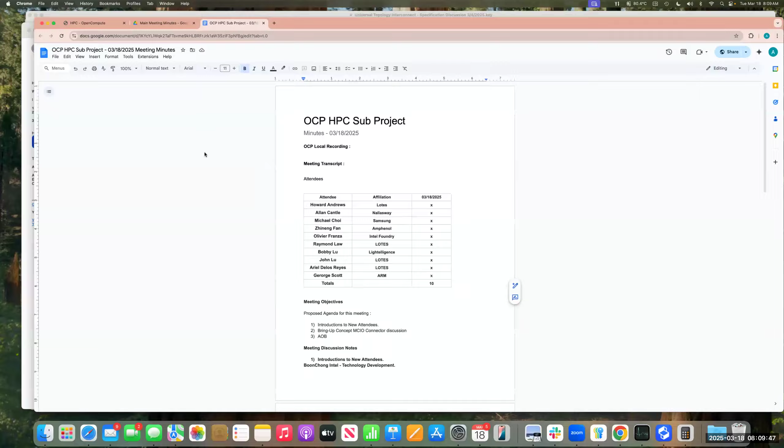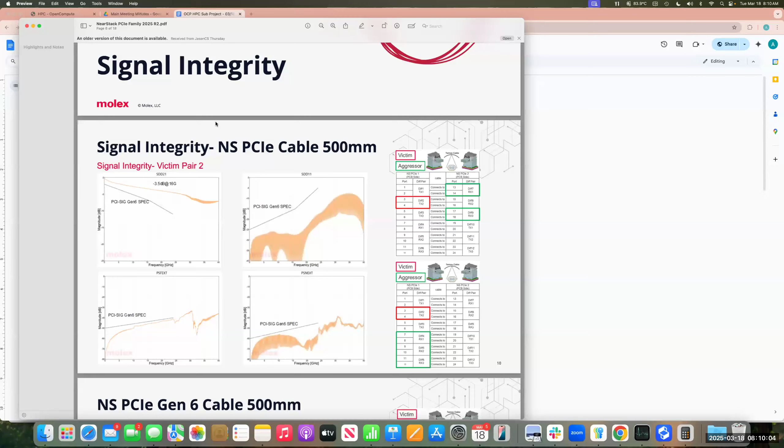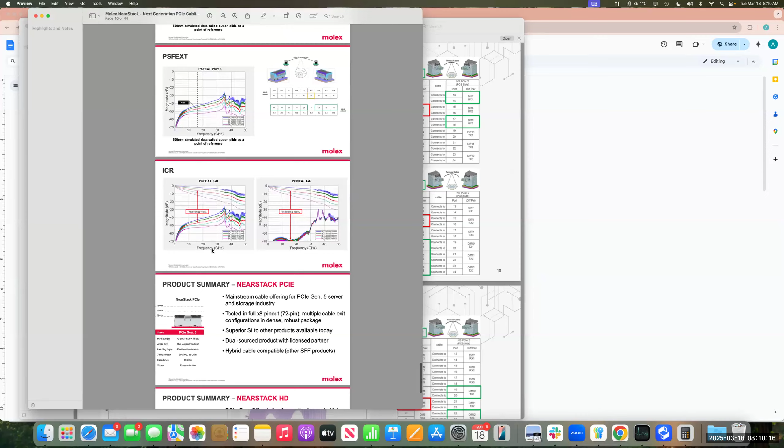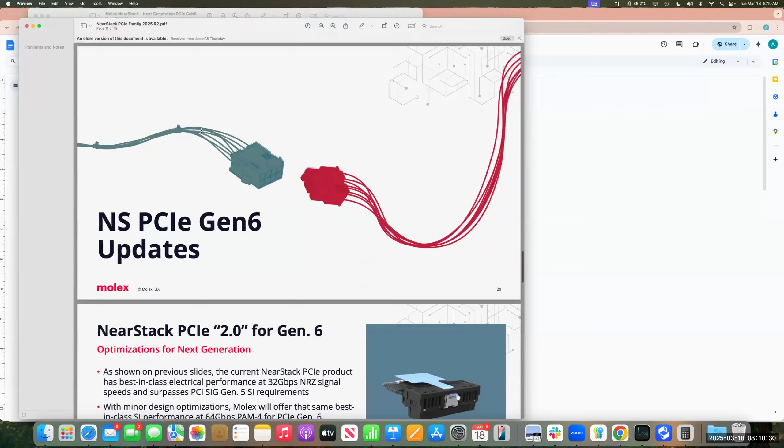Right, okay. I was also looking at NearStack, from a size perspective and a height profile perspective, just comparisons. There's nobody on from Molex, but they did give me some data that helped me ascertain the actual difference between the two. They did a nice comparison for me. So they've got their NearStack HD, which is 34 gauge, and their PCI NearStacks are 30 gauge, just like everybody else.

I was investigating this from a height profile perspective, with the lower profile ones; I'll show you a bit of that in a moment. They're showing these tables here. This is a 2 meter length cable, 34 gauge, with 23 dB nominal loss, or 25 max, at 15 gigs. It's 25 dB, 27, whereas the 30 gauge is in the region of 18. Or as I put it up here, you're at 7 dB per meter versus 13 dB per meter for the 34 gauge.

Unfortunately the Molex guys aren't on, I don't believe. By the way, morning, Mitch. In general, on these specifications, guys, is this from the mated connector, the pad on the PCB, to the mated connector on the other end, or just the cable connector, or just the cable itself? These sorts of numbers. I cannot speak for Molex data. Well, as an industry, if I asked what is the loss of your cable, would you give the cable itself, the connectors attached, or PCB pad to PCB pad? What would Amphenol do? Is there an industry practice when you quote a cable loss?

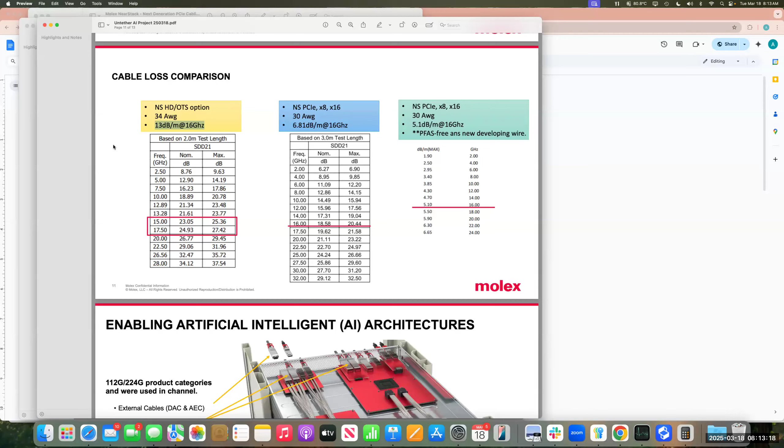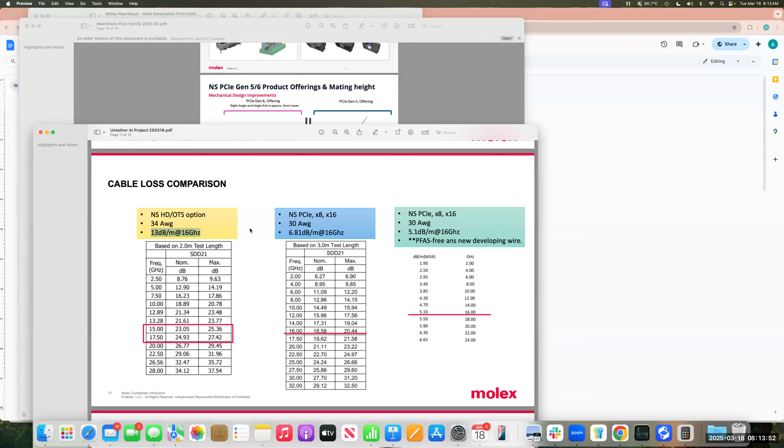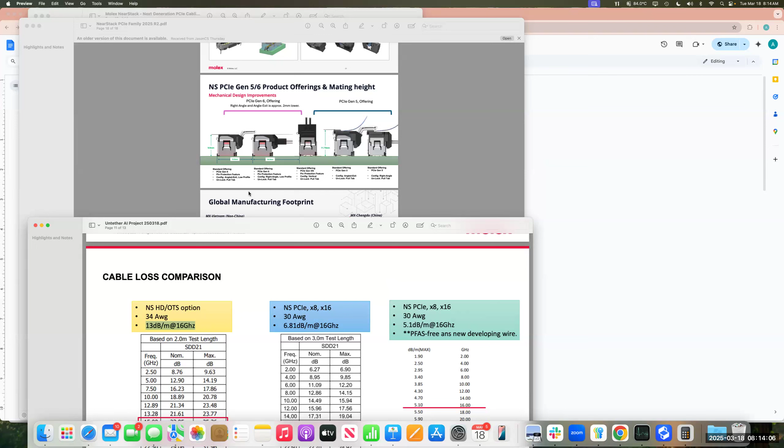Yeah, usually the more specific wording for the cable itself is what we call the raw cable loss. And if we do the whole thing, we call it the cable assembly, or more specifically, the mated cable assembly. Is there another chart that shows the assembly, including the connector, or is it just the cable? This one probably looks like the cable itself. I don't think it's tied to a particular product; this looks generic, to figure out your budget. So it's going to be worse when you add the connectors, obviously. Yeah, connectors can be a little noisy. The loss value presented here could be the raw cable itself. Yeah, possible. Right, okay.

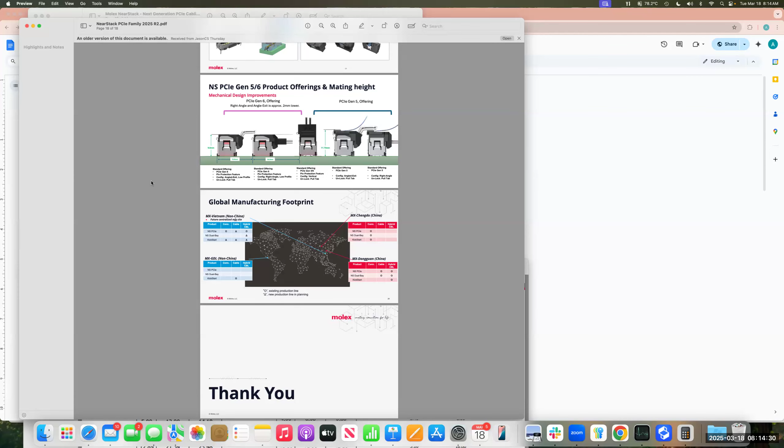Basically, if we assume this is just for the cable itself, then we're in the zone of 16 dB for a meter. And I guess the overall budget for a PCI channel is in the region of 30 to 40 dB for PCIe Gen 6. Does anybody know the overall budget? You mean the PCIe spec? Yeah, the spec is 32 dB. So we've got a 32 dB total channel loss, and we've got 16 dB.

We got 16 dBs in the cable. Right, so where do you get the 16 dB? I tried to, well, there was just that standard cable there. For one meter it's like 16 dBs per meter for the 34 gauge. Okay, 34 gauge. Okay, so yeah.

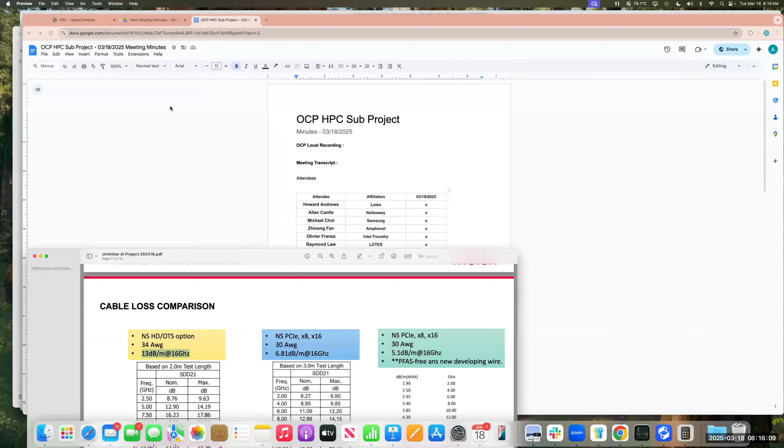The number I think you just showed is 13 dB per meter, right? And the connector maybe like 1 dB. Oh, 13, yeah, sorry, you're right. My bad. I was thinking 16 gig. Okay, 13 dB. I was trying to figure out where the 16 number came from.

13, my bad. So it's 13 dB per meter versus 7 dB per meter, for round numbers. So we're twice as bad with this cable. And obviously in the channel you need to allow for escaping the die, the package, the PCB, through the connector. So assuming that's just raw cable, we've got 32 minus 13, we've got 19 left, right?

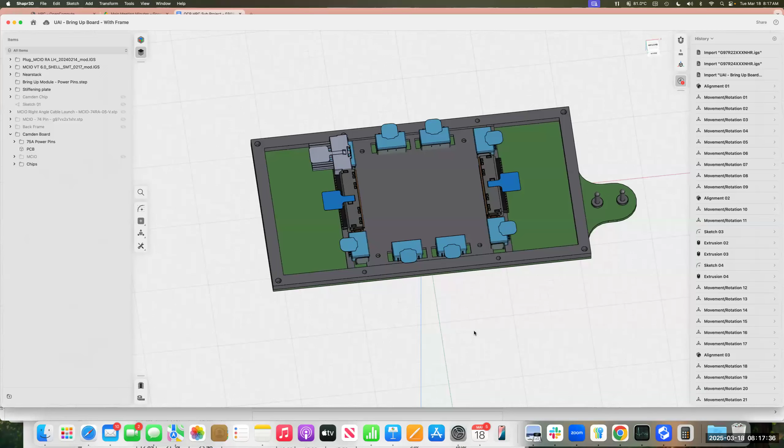So we got 19 dB, divide that for each end, so 9.5 dB per end to get out of the package, on the PCB and through the connector to the cable. So I guess if I flash up my model here, basically we've got a channel from the die, which is going to be somewhere around here, worst case to here.

I think I had about 2 inches total from the die bump, but obviously it's got to traverse these impedance discontinuities through the connector to the cable. So we've got a total of 2 inches from the die bump through the ball of the package. And these big chips would probably be CoWoS, so they have some sort of passive interposer, which I guess won't help things. So effectively we've got 9.5 dBs to get to the cable at both ends.

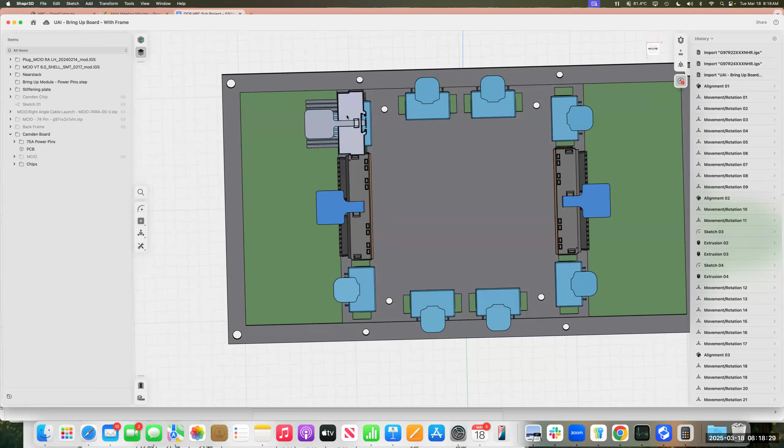So what I'm trying to get to is, between these modules you're going to have a 1 meter cable absolutely worst case, and it's probably going to be closer to 0.5 meter. But if we use 1 meter as worst case, it doesn't seem unreasonable. I remember when we were doing OAM modules, albeit that was at PCIe Gen 5 speeds, not 6.

So guys, Gen 5 versus Gen 6 is going from NRZ to PAM4. So you're still at the same Nyquist frequency, right? So does that impact the loss, or are you more in the noise because of the PAM4 encoding, I presume? Yeah, the mode change only impacts the noise. Yeah, that's correct.

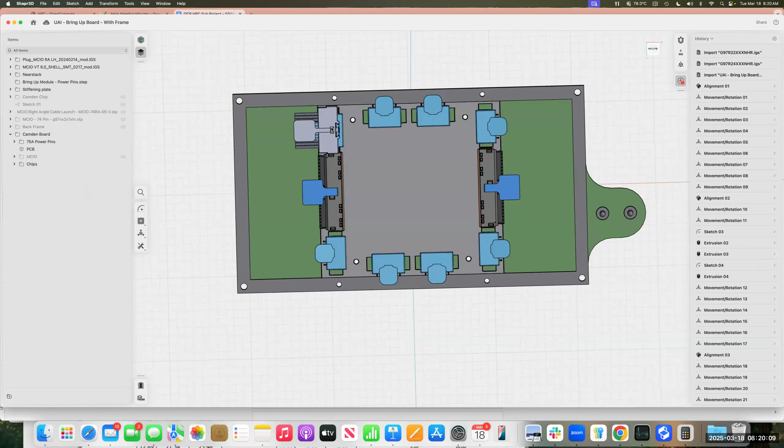But the calculation you just mentioned, did you put the root complex side and the add-in card, non-root complex side package loss? Right. Well, in this sense these devices are talking to each other, they connect between each other as a PCIe link. So the loss on one will be identical to the loss on the other. It's like going between two OAM modules. Okay. So what's their package loss?

Well, I don't know. I guess there's the industry nominal. On the OAM module, for instance, they had an 8 dB loss going from the die bump through the package, through the OAM PCB to the Mirror Mezz connector, and through the Mirror Mezz connector to the actual PCB pad on the motherboard, i.e. a mated Mirror Mezz connector. I remember that was a budget of 8 dB.

And then you had 8 dBs both ends, so 16 dB, and I think it was a 30 dB total we were working to on PCIe Gen 5. So that left us with 30 minus 16, 14 dB for the UBB motherboard. That was the way the calculation was done back then when I was working on that.

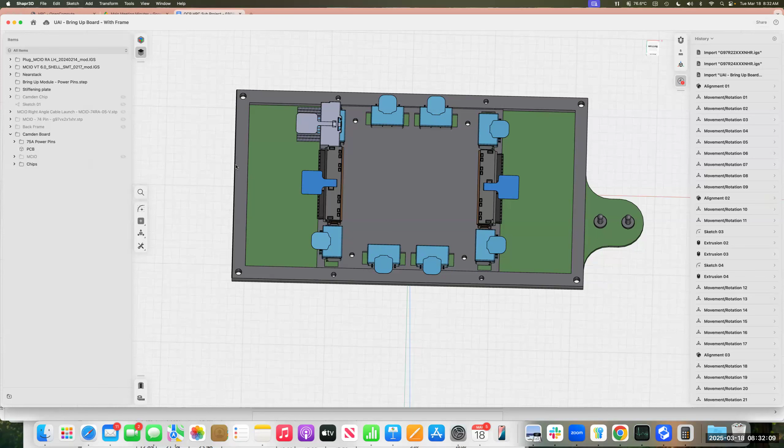Okay, and you might have modified the connector design slightly on PCI Gen 6, but we can use the PCI Gen 6 connector, I'm assuming, if you've made any mods compared to the Gen 5 one. Yeah, we use the connector, and the paddle card may be modified a little bit, but I think basically it's still the same. All right, excellent. So I'm going to conclude that we can use 34 gauge cable.

Sorry, and by the way, potentially we could go to 32 as well, I guess. Obviously, thank you to Lotes and thanks to Z, who sent a cable where we did some measurements. Samsung actually has the Amphenol cable where he did measure it. It was only 1 meter. So I'm not sure if you sent Samsung a 34 gauge cable actually, but anyway, Lotes sent me a 30 gauge cable, which if I just put my camera on,

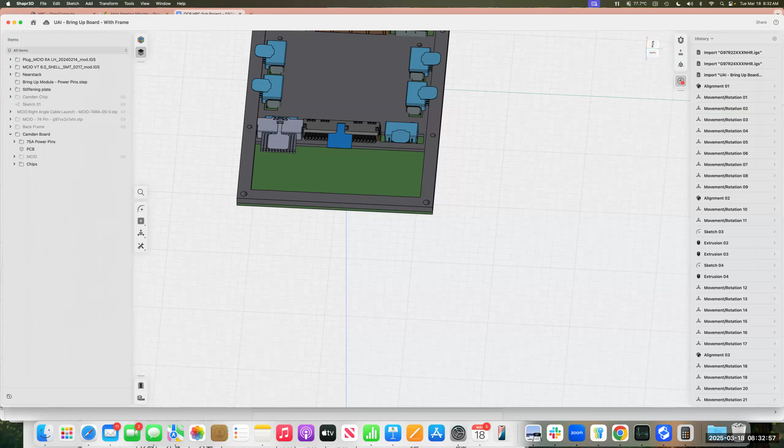there we go. So this is the 30 gauge cable, and it really is solid and chunky. And Lotes were saying about the folding. I can see the challenge. We probably don't actually have to get them pre-folded at manufacture. And I know that this is significantly bigger compared to 34 gauge for sure. So I guess in that sense,

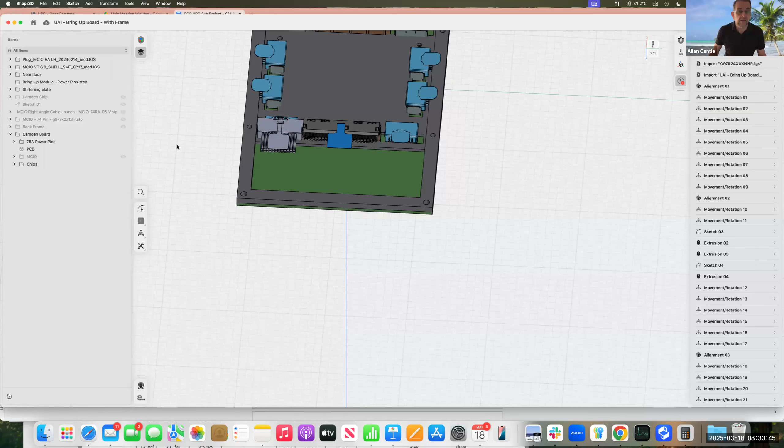Oh, hang on. I was showing that to myself, wasn't I? Did you see me sharing it or not? Yeah, we did. Okay.

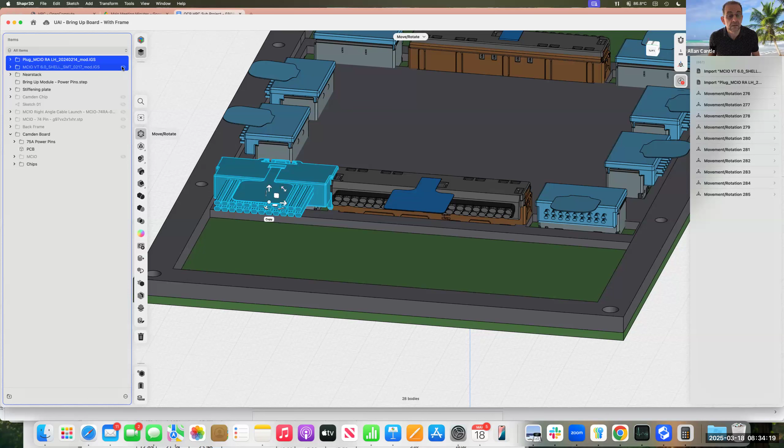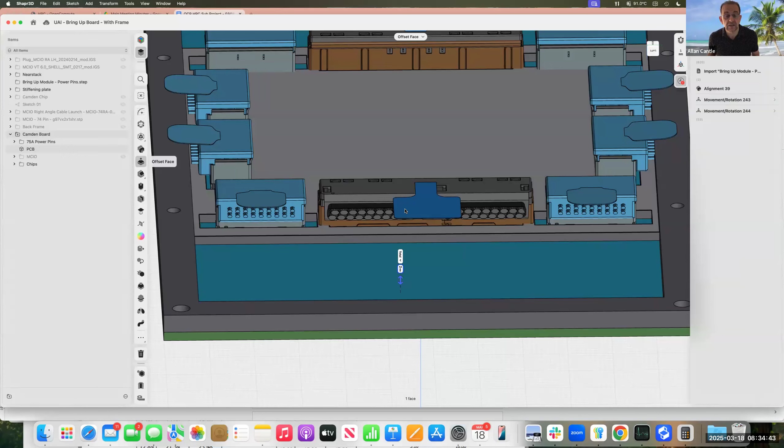So if we just zoom in here, by the way, this is a Lotz low profile one. Let me just turn off the Lotz low profile one a minute. Okay, so these are the Molex NearStacks. So this is their PCI x16 with 30 gauge cable in it. And by the way, it's actually a longer connector than the standard MCIO, which I was a little bit disappointed in.

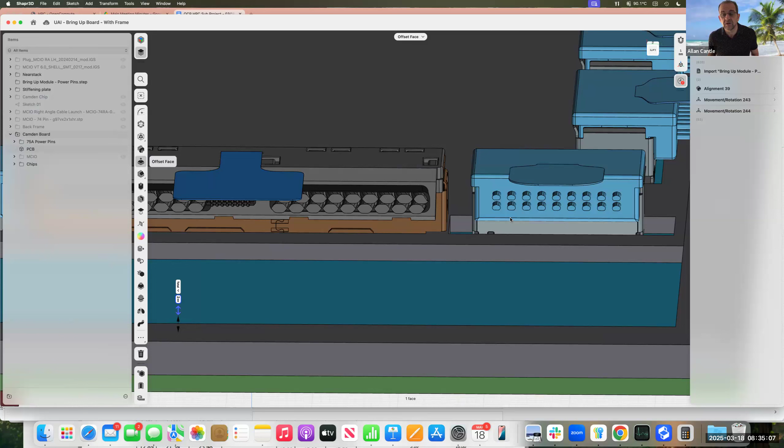But they've actually done a pretty good job of representing the gauge cable, because you can see this is 30 gauge cable. And in their HD version, which I'm thinking of using for the point-to-point because it was smaller and because of the height profile, there's our 34 gauge cable, so you can see how much smaller the cable is. So it's nice to have a true representation in the model.

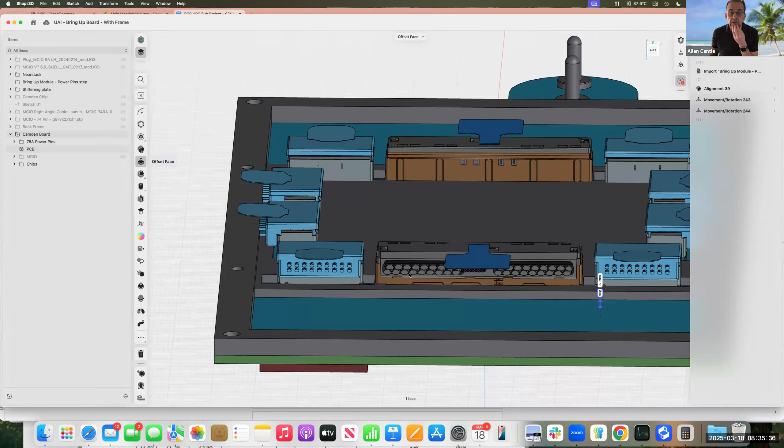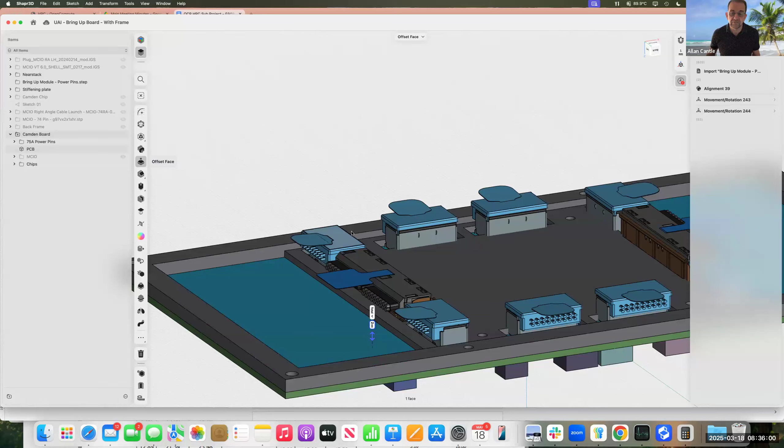So this was the other thing that I had. Whereas I think the other models that I've got basically just generalize the cables into one bulk lump and aren't necessarily representative of any particular gauge. So this can give us a lot more routing options. The other thing with this lower profile capability is if we did stay with the 13mm spacing we've done, we can actually fold cables and route them across the top as well between modules. So it gives us more routing of the cable between the modules.

So this is a reason, I'm trying to get super flexibility in terms of the ability to configure different topologies between these modules, and hence why I'm spending a bit of time on that. So I was thinking that maybe we could keep the host connections. These x16s connect to the host, so we could keep them at 30 gauge and route up to the host. But the ones that go module to module, we could go to the 34 gauge. That was where my head was going.

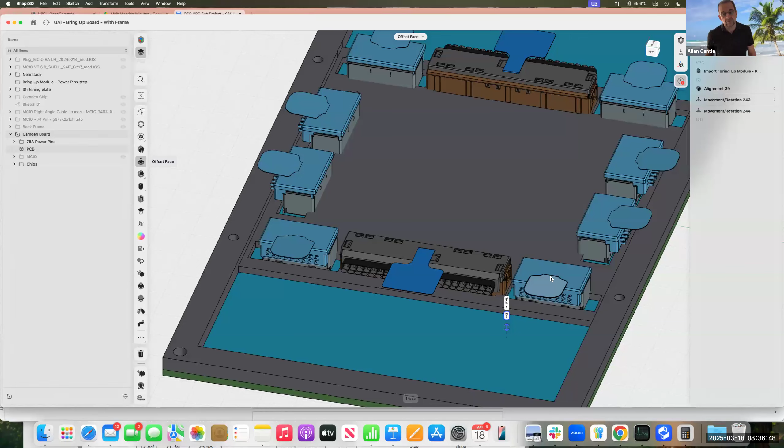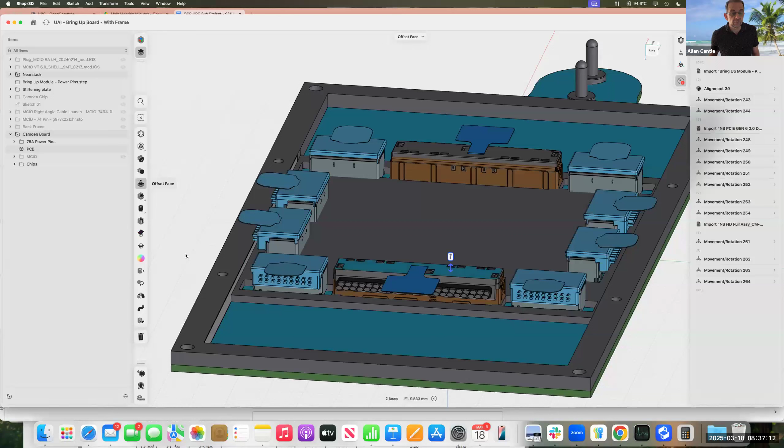So just looking at the height, switching to height profile now. The near stack was quite attractive because I think it offers the lowest height profile of about 9.8 millimeters, less than 10. But you guys have both been sharing yours, so let me just turn off the near stack stuff and put on the low profile one. So here's your low profile one, which I believe is, taken to the top of the tab, 10.8. So it's an extra 1 millimeter.

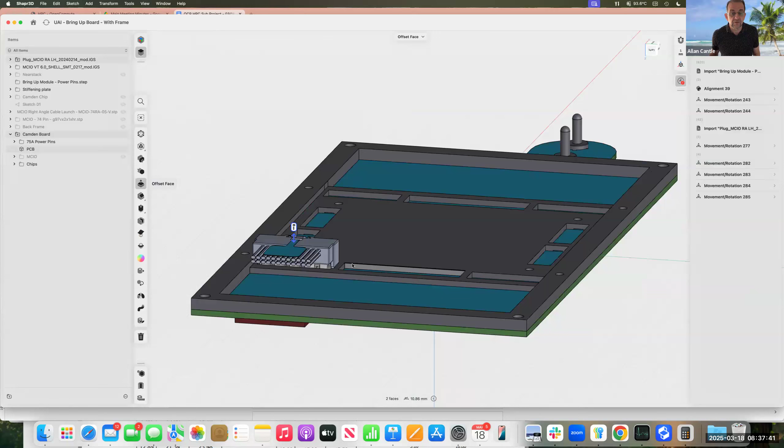So it's a lot better than the original 14 millimeter, or whatever it was we were dealing with on the standard MCIO. So this is really quite close. Plus, obviously, the MCIO is much more of the industry standard. So the only disadvantage, if I pop the Nearstack back on, is what happens is we lose. This one's longer than the standard MCIO, but these little ones are shorter because they have less IO on them, and we're looking at using less IO.

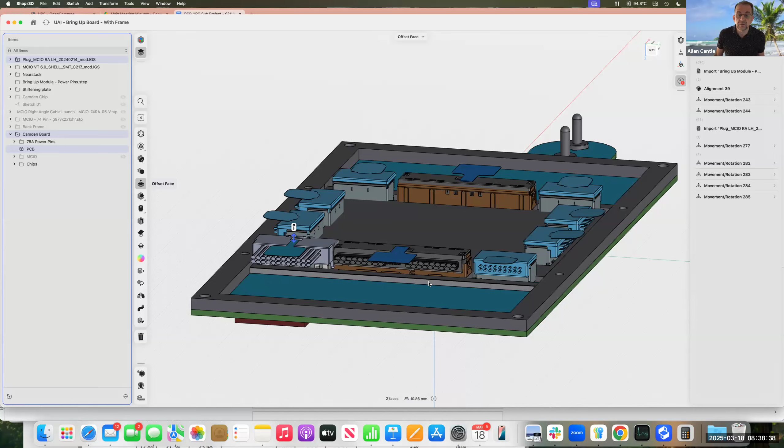So, but actually, in our universal topology interconnect as well, we're reducing these IO counts down. We don't need to use all of these, so we do actually lose a couple of pairs. So that makes things even better on these ones. Whereas the main host connection will be a full-blown MCIO with all of the sidebands for connecting to the host. So I guess in conclusion, I think I'm concluding then that we stick with MCIO.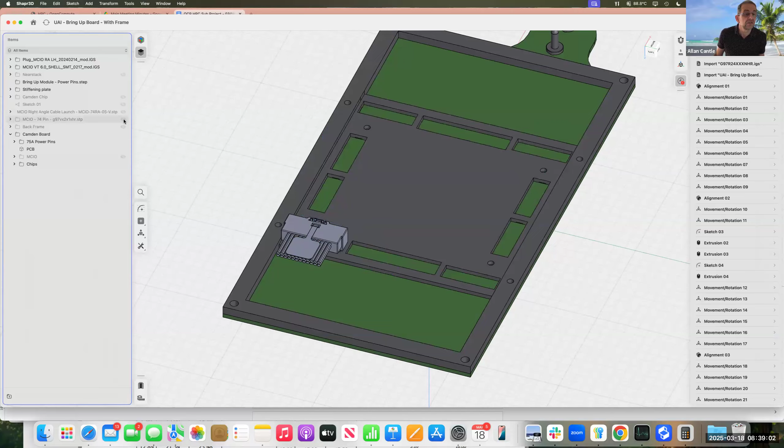So let's just turn this off again. Let's turn off Nearstack. If I turn on the full MCIO implementation, which is what we've been working with, these are the standard ones. These are the Amphenol ones, but the standard height. If I put the standard height Amphenol ones on, you can see that at the moment, that's the highest point. We're at 14.8 millimeters, so the Nearstack was a big win over that.

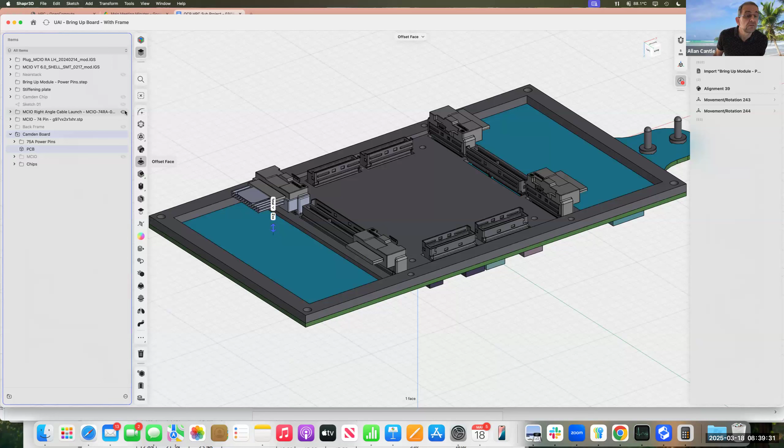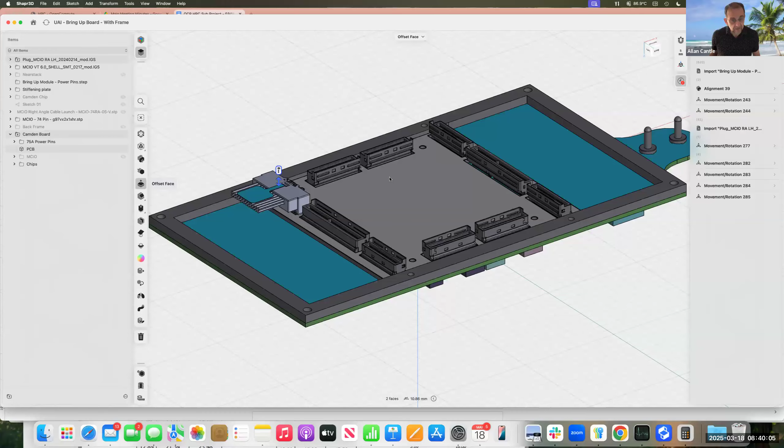So I think that's my final decision. Is there anything? Would you support that, guys? I guess Z, Howard, in terms of a viable way forward, or does it make you nervous what I'm saying? I don't believe so. 34 gauge is pretty thin. If we go to 32, that'd be nice. The low profile, I think, is our best bet in this application, and hopefully we'll see business from other places as we're seeing a push for lower and lower height product.

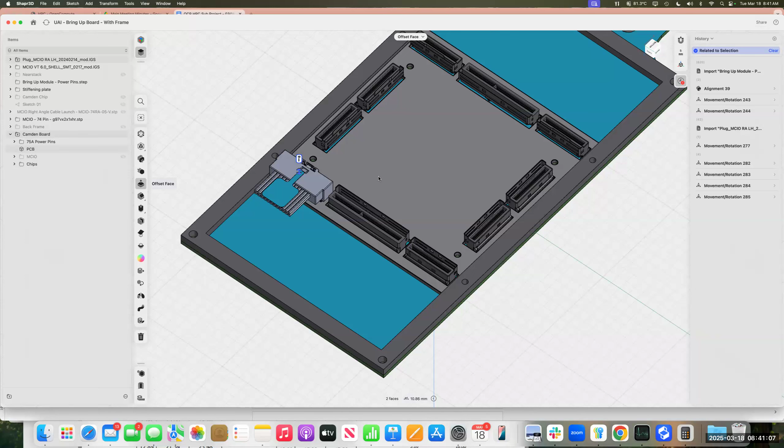Z, do you have a comment? Yeah, I agree. It's reasonable here. And 34 gauge is a thin wire, and maybe I probably need to check with the engineer on the reliability side, right? Whether it's easy to tear off, or basically during the operation what we need to pay attention to. But I think generally I don't have an issue with that. Yeah.

Okay. Ariel, do you have a comment about 34 gauge? Well, the size to begin with is really small. Soldering, termination may be a challenge. It's fragile, yeah. Because the smallest that we have done so far in the assembly is 30. We haven't gone to the assembly stage for 32, or even much more on the 34.

I think, and Allan, you can maybe relate to this, as the part is laser attached, welded, soldered, whatever, the wire that's attached, of course, is truly permanently attached. And with the very thin wire, you end up with a hinge at the point of solder as it moves away. So as that wire is bent, the point of bending is right up against where it's soldered. So the thinner it is, the more fragile it is.

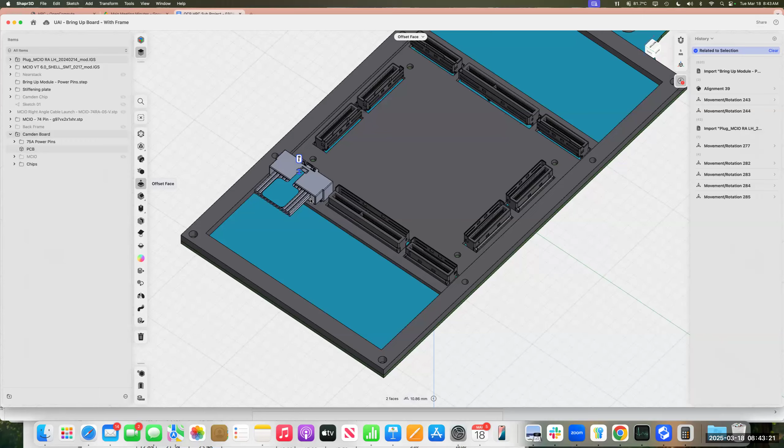And since it's copper, anytime it moves, it work hardens. Just like when you bend a paper clip, you bend it, and eventually it breaks at that point. And so that's just one of the considerations. So if we can, as a goal, move to 32. You bent those parts that are 30, you realize how stiff they are. And if we could go to something that's not 34, that would increase reliability by maybe not an order of magnitude, but a lot.

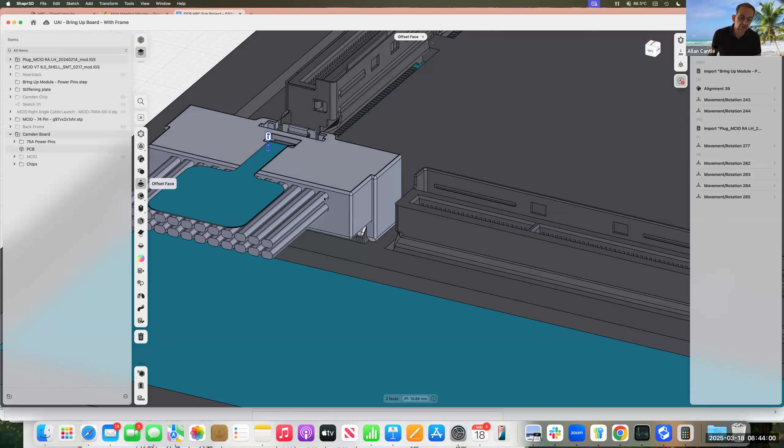So I think I understand what you're saying. So in the manufacture, you're going to obviously have to put the bend in here and solder to the paddle card. I guess that's what you're saying, right? Yeah, and it's solidly attached. And it's solidly attached. But then you've got this molding around the cable. So in operator use, you're going to bend it here, not at the solder joint, right?

Well, as you bend it, it's like your arm in a sleeve. As it's bent, the wires push and pull with each other. So you don't get rid of the stress actually, all the way inside that molded connector. Okay. I was thinking that the mold would keep the stress away from the joint. No.

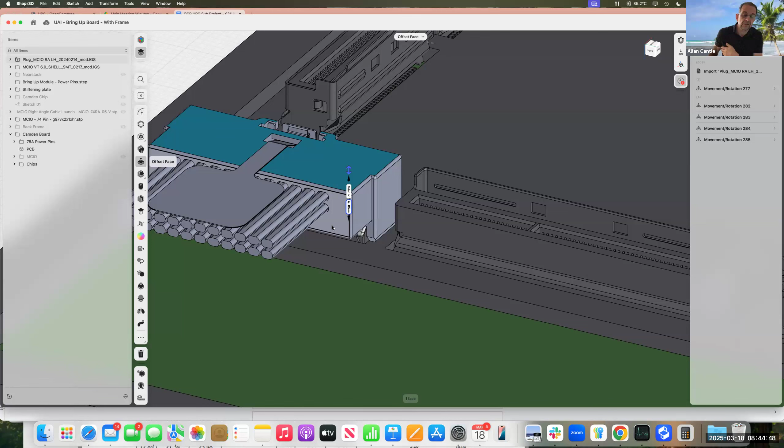Yeah. Well, as we talked about before, the sharper the bend, the more those wires squirm in that sleeve. And you want them to, but dealing with 34, you can imagine it's a very fine wire. Right, okay. I mean, again, this installation in terms of use, I guess I'm proposing this is a manufacturer installation.

These aren't installations where an IT guy will go in and modify these on a frequent basis. So these are sort of insert once. And I guess that's the case on most servers, right? Yeah, certainly. Most everything is made at once, hopefully never see it again. But in some cases you have an MG, in some cases you have a Toyota, and the nature of modifying things or moving things or changing things.

Okay, so from a Lotus perspective, you've always done 30 gauge. From Amphenol's perspective, I've seen 34 gauge on your websites. So you do 34 gauge in this MCIO already, correct? This isn't going to be a special for you. Yeah, I would guess so, but I think it will be very low volume, certainly not as popular as 30 gauge.

Okay. So the conclusion is basically availability. This is another modification, Amphenol do it, but probably only in low volume compared to the other stuff, and Lotus would have to tool up for it. Well, there's lots of opportunity for yield problems, the finer the wire goes and the closer they are together. And as we move forward, that's a balance that goes to price and cost and yield. So got to be careful with those fine wires.

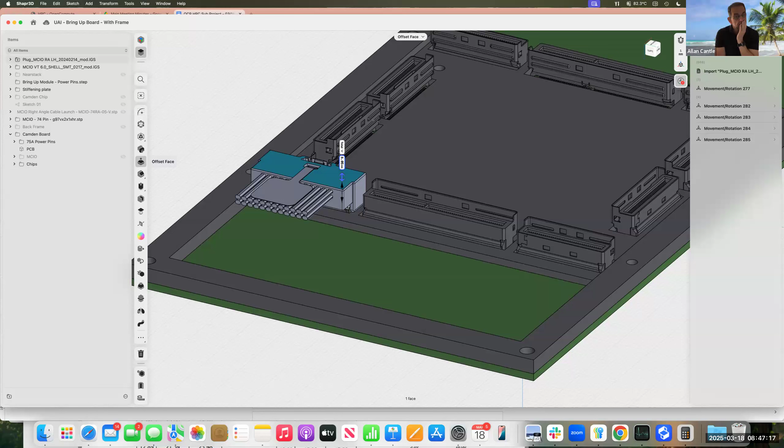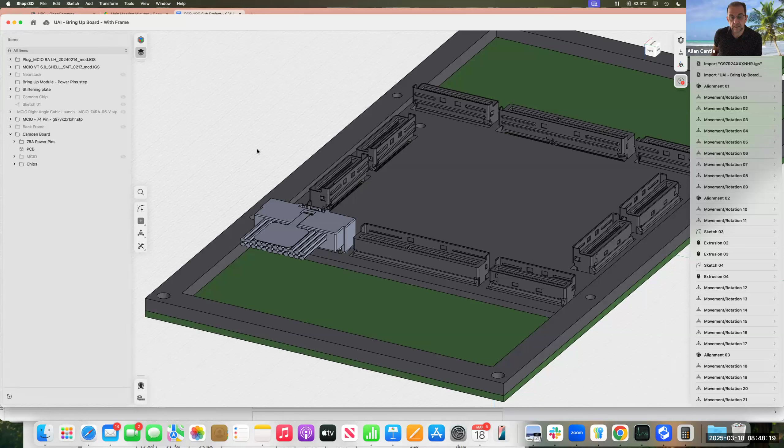Yes, I think on my side, let me check with our production team before really making this commitment. Okay, yeah, if you can do that. I swear I've definitely seen a 34 gauge MCIO cable on DigiKey or something like that, or on your website.

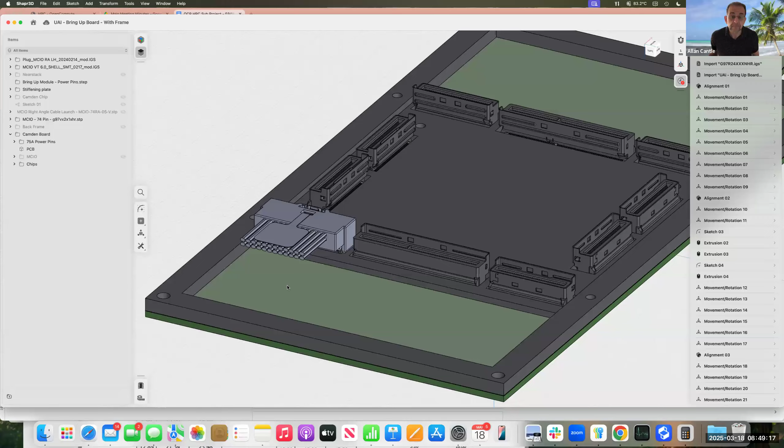So it would be good to get more clarification on that, because obviously we've got some tooling changes like the surface mount connectors, but I didn't necessarily want to be going down the avenue of cables that don't exist. So if Amphenol are already making them, that keeps it in play as far as I'm concerned. So if you can get that, Z, that would be appreciated. Okay. All right.

The other topic I wanted to switch to, I'm going to need to stop sharing and dial in from my other laptop, because it'd take too long to load the model otherwise. So let me just see if I can quickly dial into today's call. Sure. All right, so hopefully now I'm going to share my screen.

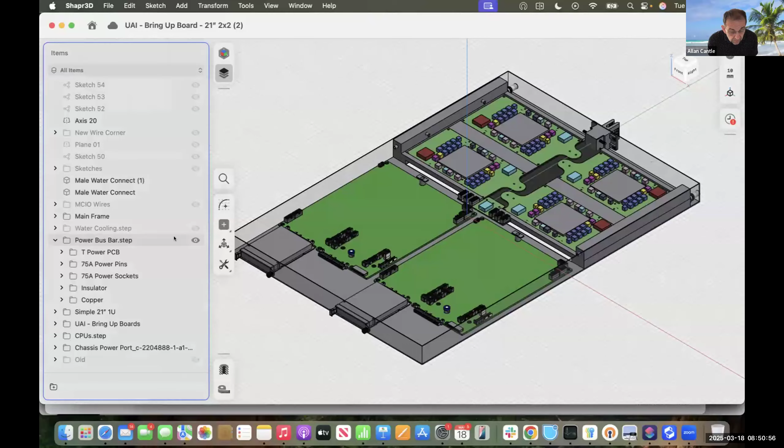Okay, so what do we want to do here? Like that one. Set. Power connector. Wow. Okay, let me isolate that lot. That might take a while.

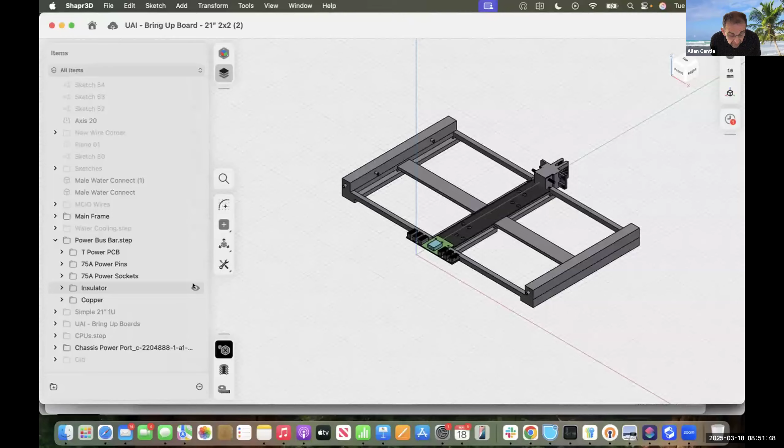But I wanted to just touch on this exoskeleton and how it's been helpful looking at the power bus bar. There we go, that was quicker than I expected. Good. Okay. All right, guys, let me just turn off the insulators so we can get a view of the copper bar. There it is. And also just turn off that T-bar.

So this is the actual current makeup of the concept. These are the copper bars. The middle bar is ground, and the other two on the left and the right are the 48 volts. Now, the first observation that Howard made was that they're all the same size when the middle one's carrying twice the current of the other two. That was just what we did when throwing the concept together, so we can proportion these to a certain extent.

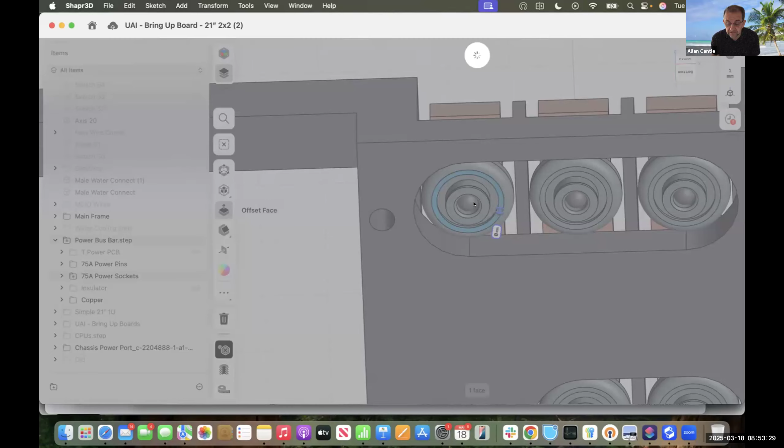I think we are somewhat restricted, because at the moment these are Molex 75 amp power pins, so we're restricted by the size of these pins and the hole that they require. In fact, these are the actual pins that go in. I'll hide the pins. Being very slow, sorry. Let me just hide those.

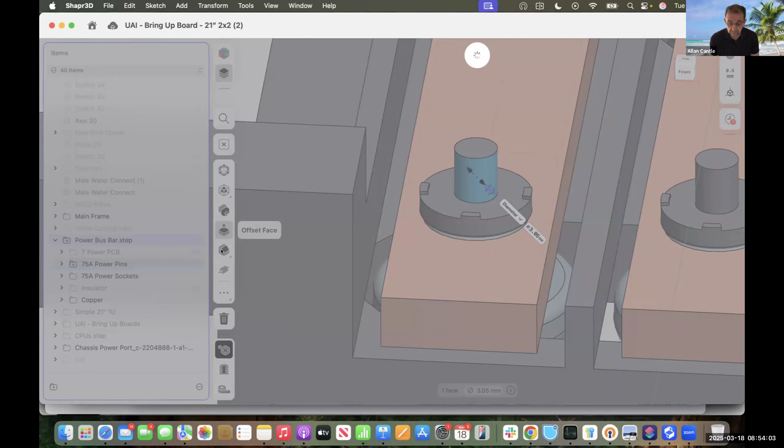There we go. So you can see this, the pin in the socket. So we don't have a lot of room to make these bars any narrower. That's the challenge. So we potentially could make this one a bit wider. I can look into that.

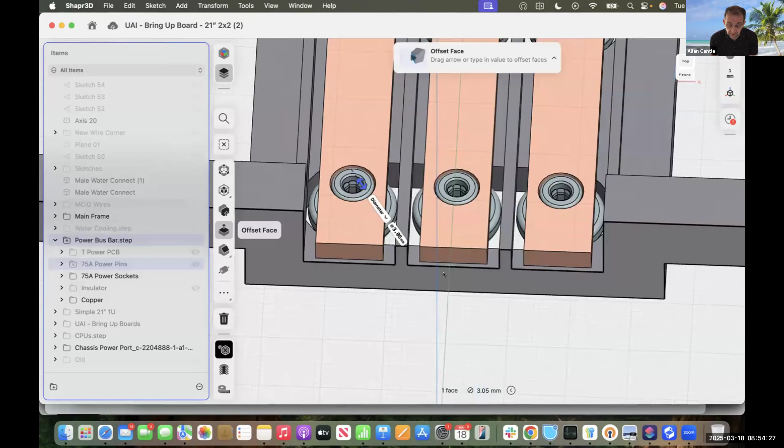But anyway, so Howard did a basic sort of analysis of this, and came up with various. I guess I don't have the details to really flash up, but came up with various gauges of cable. You used 200 amps, right, Howard? We basically need of the order of 100 amps at 48 volts, and I think you overrated it to 200 amps, and when you look at the different types of cable you can buy with various gauges, they're rated at a temperature rating, so current at a certain temperature.

And I guess my question on that is that basically the bus bar, when you say it can do 200 amps at 60C or 75C, is that the temperature it will go to? Can somebody explain that? Because I always think of IR drop is what I'm worried about. How much power am I losing in the bus bar? So can anyone explain the temperature relation of a copper cable that's rated at a certain current at a certain temperature?

Yeah, I think the way that rating works is given an environment of 65 C, which is very hot. Right. You have wire in a tray. This is that the wire at that 65 C environment will not overheat. You'll get some watts dissipated in the wire, and given an environment where you've got a bunch of these wires in a tray, you're not going to run away. Okay. All right. Thank you, Howard.

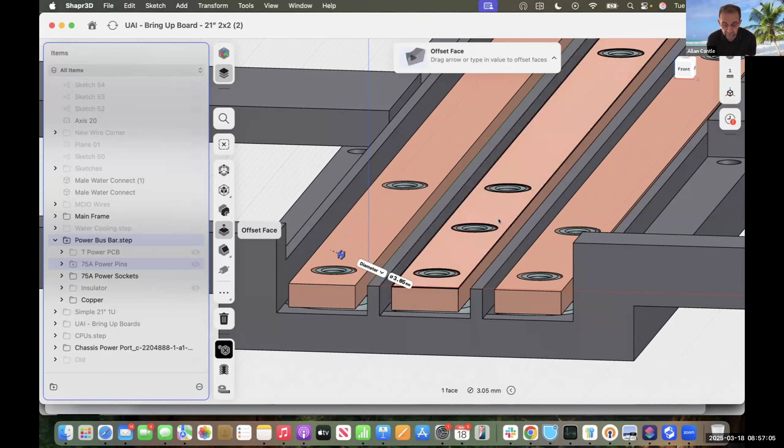That makes sense. Because I was looking at the relative resistance, and how many watts am I dropping, what's the efficiency loss percentage-wise. And so I think we did some cross-sectional area. The concern we've got in the model here is that these holes give you neck-down points on the copper bar, but equally these pins are going to be soldered in. I'm assuming we're going to solder them rather than press fit them. I don't know how those are attached to the bus bar. I guess there might be variations on either solder or press fit.

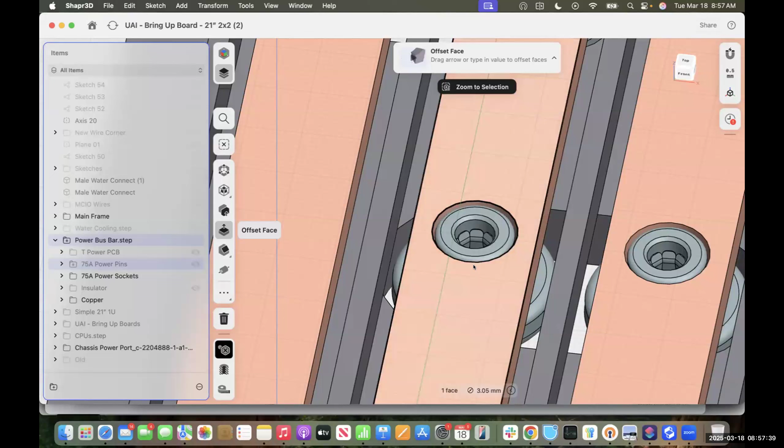Is that possible? That would be a very, very hard part to solder. Right. Yeah, no, it would. You'd have to run it through. So you're assuming that would be a press fit then, are you? I'm assuming it would be a press fit, yeah. Like there would be a ring of splines around that, or something. Actually, I don't believe there are, to be honest. I think they're smooth. Yeah, I think I saw the model. They're smooth. Yeah, no, they are. So I think they're designed to be soldered.

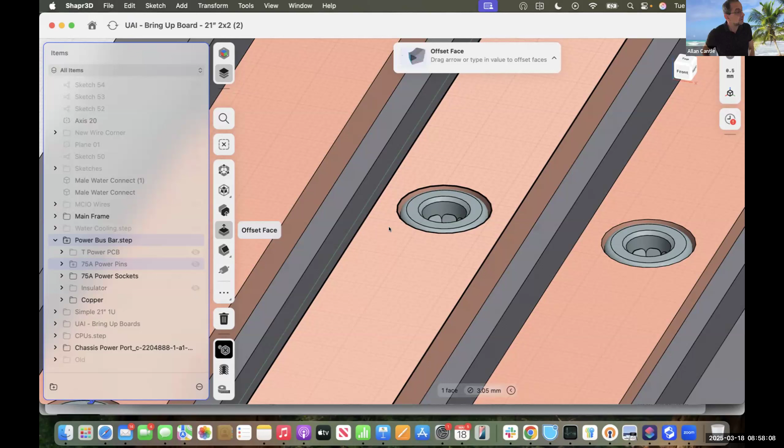Obviously, you'd need a very serious solder bath. You'd have to get the entire copper bar up. But in these situations, I guess that might demand that, right? Well, you'd also be heating the beryllium copper spring that's on the inside, and it would change its properties completely if you soldered it in place. So there's some real issues with that, and I just don't know enough about them. Okay. This is standard stuff off of Molex's website. I'd need to go back; I've not looked at it in that specific detail.

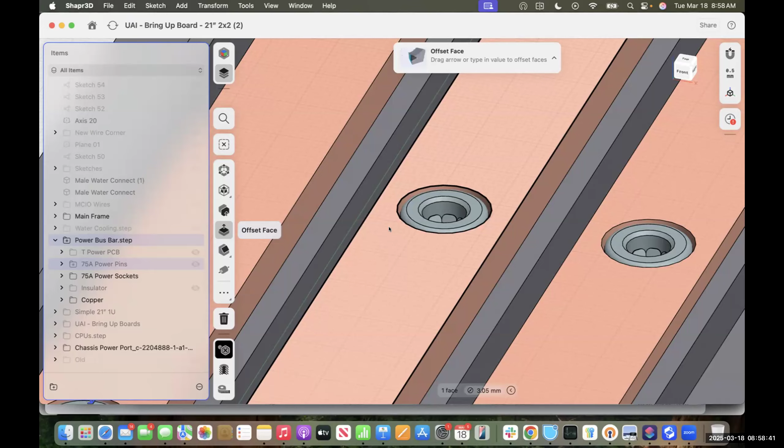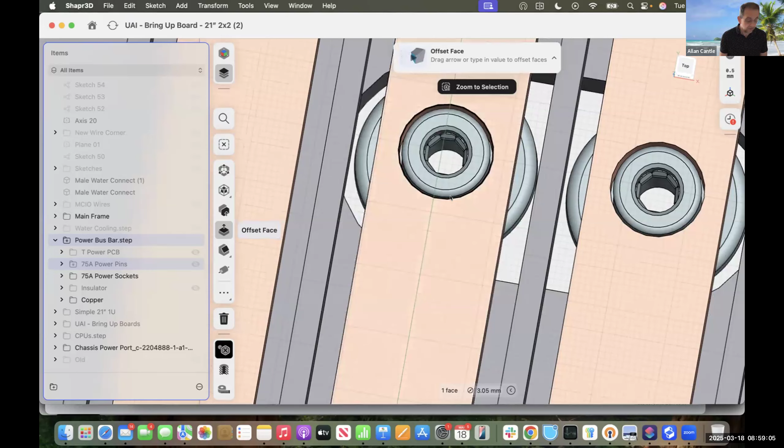But you said you do these type of pins as well, right? Yes, well, I know Amphenol and Molex and Lotz do similar ones. And everything that you do is press fit, then, is it? I don't know enough about it. Okay. So depending on whether this is press fit or not, the resistance properties will be affected going through this, but the power pin will be in place as well, so it will replace the missing copper to a certain extent, I guess.

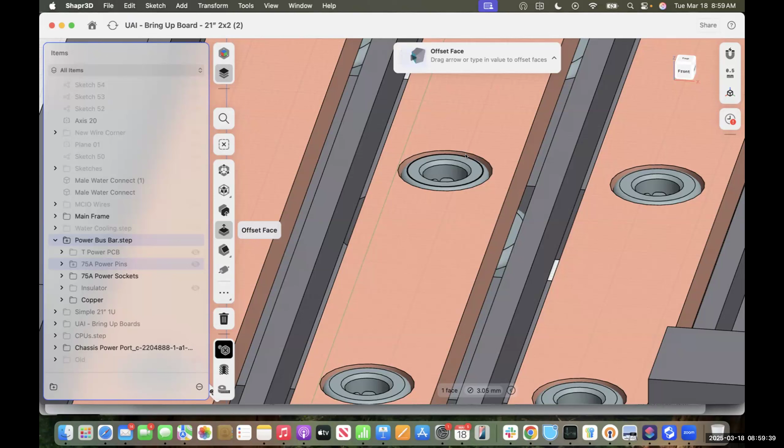Good. Yeah. You can 3D print copper these days. Well, including the pin, including the socket. Yeah, no, those would be almost perfect on the inside. So you'd need to have a bushing. Well, you need the beryllium spring in the middle as well. Yeah.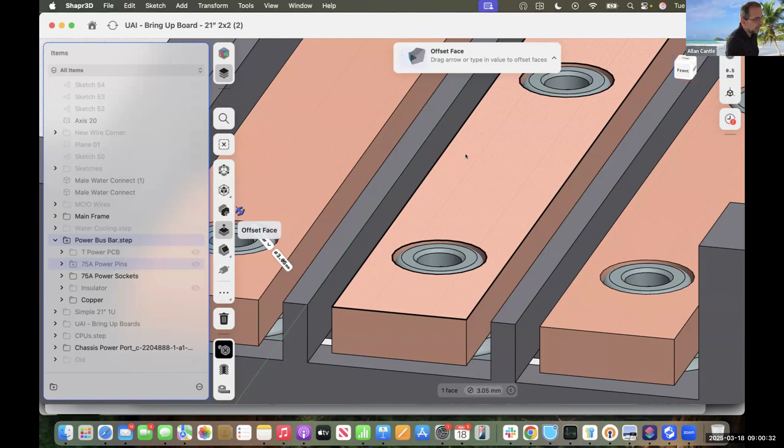Okay. So in your analysis, I don't know if you drew any conclusions. I was sort of encouraged that we weren't a million miles off. With your 200 amp, where you sort of overspec'd it to 200, when the total load I think was in the order of 105 or 110 amps at worst case, if it was fully loaded, like a kilowatt per module plus like 500 watts for each CPU, and then a 10% overhead for efficiency losses elsewhere, I think I ended up with a total of 110 amps.

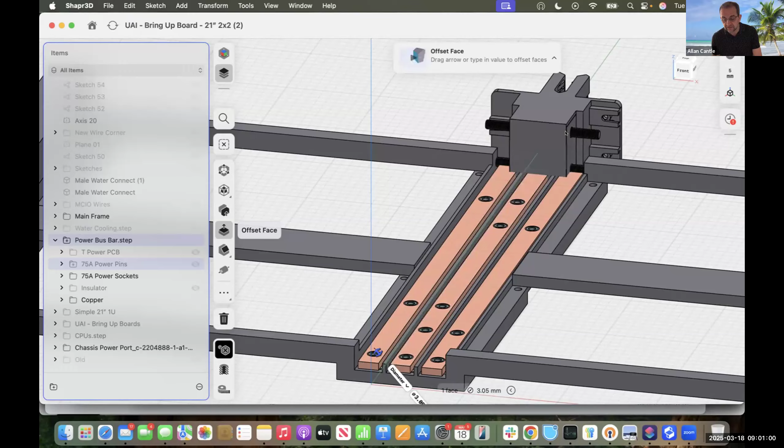And what we've got to remember as well is, as we roll down this bus bar, your two loads are tapped off right at the beginning, so your current almost halves as soon as you've gone past these two loads. The only other thing to note is this is an OCP industry standard connector. We'd probably need a modified connector here to mate efficiently with these bus bars. This is literally just stuck on there at the moment.

Probably the way to go, the way this particular part is made with these threaded studs, is a very short piece of cable of comparable size that would jump over and screw down to the top surface of this. It looks like a 3-inch wire or something short. Right. It wouldn't be a modified connector design. That would be too difficult to do, I guess. Yeah, you don't want to do that. Right. There are different versions of this I have seen. Yes, there's a dozen. So we would need to pick the best one for this setup. Yeah, but I think what you've done here is perfect. That's an easy fix. Okay. Good.

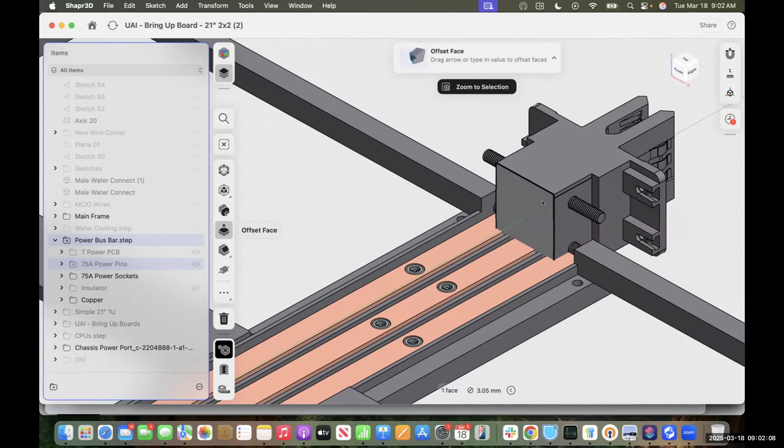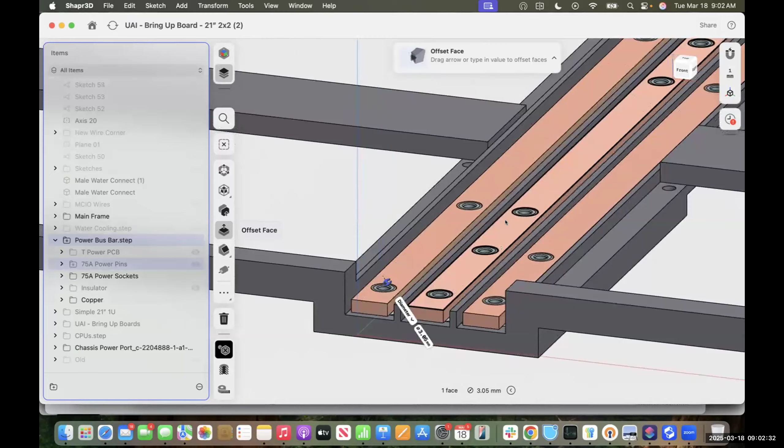I can't run the thermoelectric ANSYS here, where you could build the 3 bus bars, load it up on the left and right, and draw out on each of these spots. But a regular thermoelectric heat analysis would tell this story very well and size the bus bar to whatever you can tolerate for temperature rise on the copper. Yeah, okay. And I do think I've got a little bit of room. This is the aluminum frame, and there's a rubber seal that goes around. I think we can make this middle one slightly wider and slightly thicker as well. But again, it's marrying up with the challenges of routing cables everywhere.

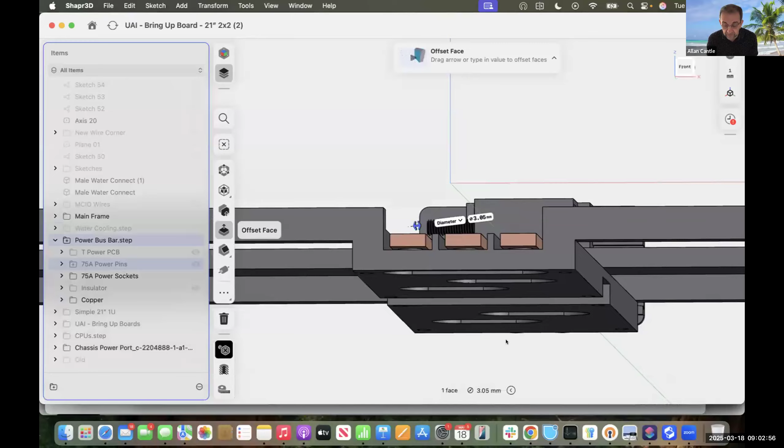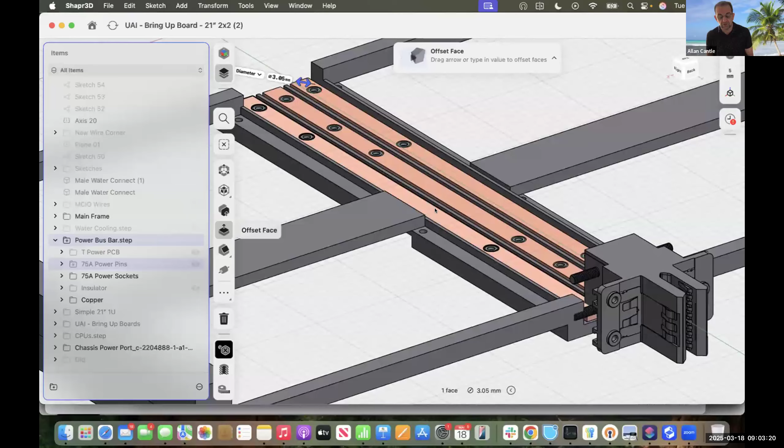There's a channel for routing cables here when I was working with the 30 gauge, and if we can go to 34 gauge, that dramatically improves. We can actually bring cables across everything. That really does help out there. So I think we can bolster up these copper bars to get to where you were saying it should go, Howard. So I'm relatively relaxed about that. I know we're just over time, so I'll let everybody go.

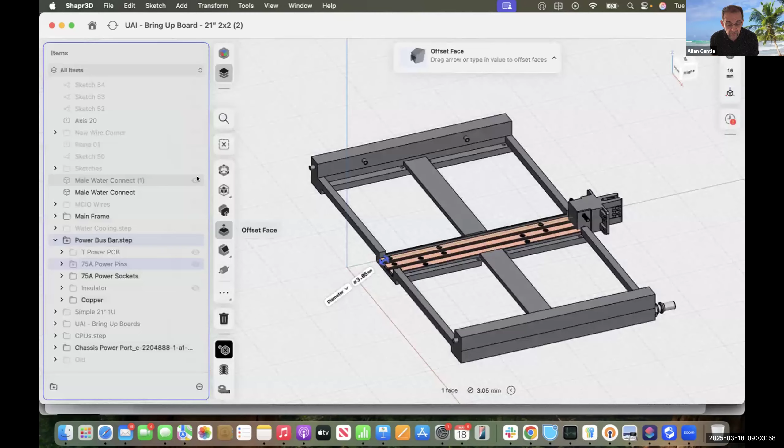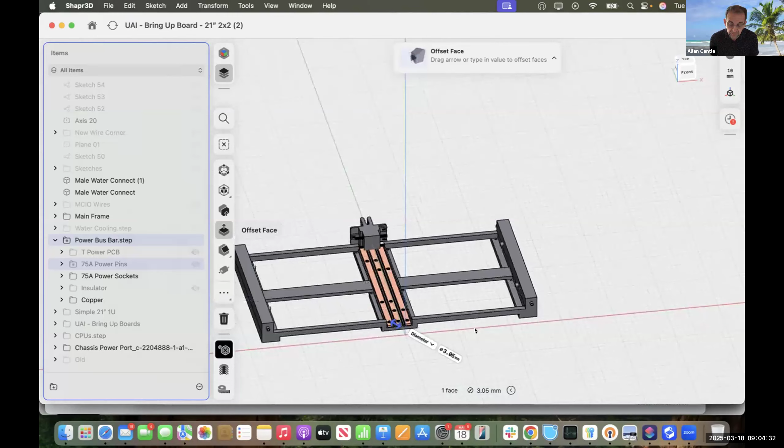But for those of you that don't know, I've not shown the water. Let me put the water connector on. The idea is this exoskeleton frame will mate up with the blind mate of the ORV3 rack so that we can bring the water in. I'm talking to CoolIT about this; unfortunately, they couldn't join today. This would be like a manifold built into this frame, with little holes where you connect the rubber pipes to the individual liquid cooled plates on the processors, and ones out the front that would go over the CPU ones. So this is the exoskeleton frame that we're looking to build.

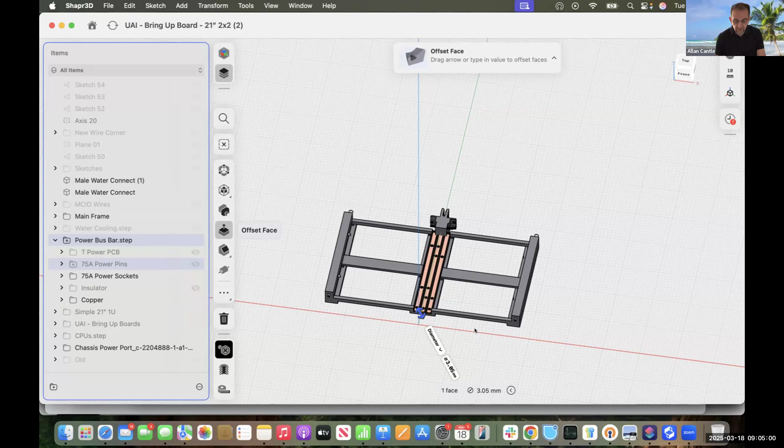By the way, Howard, is this something that Lotus would take on as a whole piece, or would you just be interested in the bus bar piece? Do you do water manifolds? I have no idea. Somebody else can answer that question. Yeah, I guess we need a partnership. On the assumption we need to work with a cooling specialist like CoolIT and a bus bar specialist, which it sounds like you are, then we need to jointly design this frame ideally. So how do we bring those two worlds of bus bar and water cooling suppliers together into this frame design? Okay.